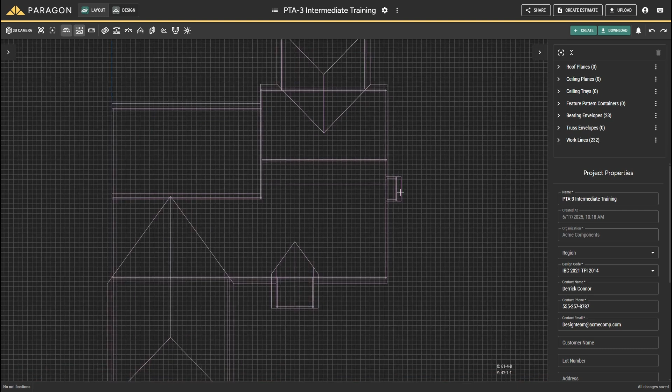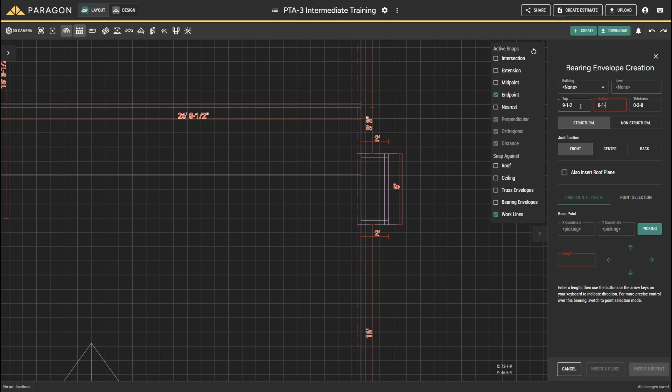Let's right-click and select Bearing Envelope. This is going to be a structural beam, so make sure to select Structural from the settings. This beam will have a depth of 1 foot. So let's add the settings for the top to be at 9 foot 1 1/2. Tab over to the bottom and set this to be at 8 foot 1 1/2. Select Point Selection and let's begin.

Let's add the beam to the fireplace. Click to insert the beam by selecting the backmost point. Press and hold the Alt key. We will move along to the front edge of the fireplace and click. Finish this out by pressing Escape.

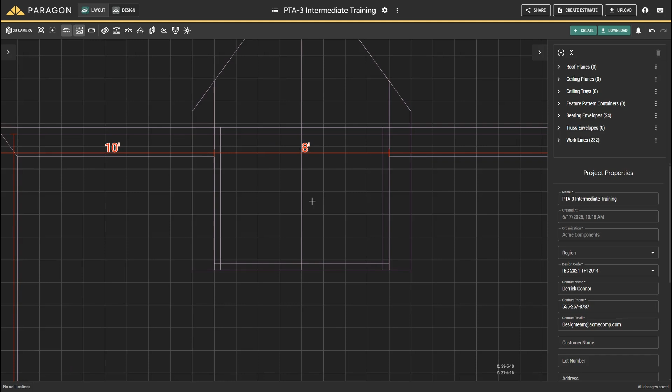Now let's pan and zoom over to the front porch. Here we actually have a different plate height for this one. Right-click and select Bearing. Here we will set our beam at 10 foot 1 1/2 for the top, and the bottom will be at 9 foot 1 1/2.

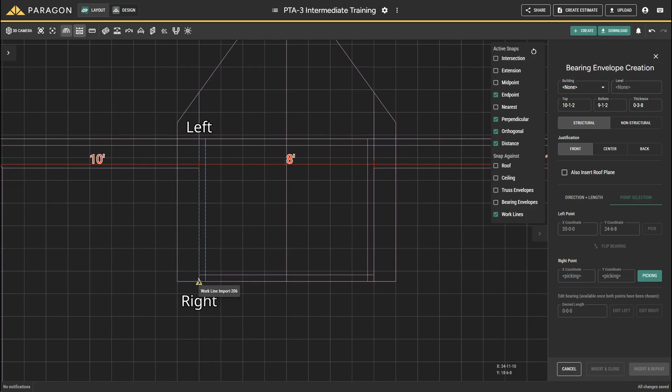Select Point Selection. Let's go ahead and start with the left top side and click to snap your bearing point here. Next, while pressing and holding down the Alt key, click to place the bottom left side. Finish placing the remaining beams by adding the point to the right, then move up and click. Press Escape. Next, we will add the 2 columns on the outside.

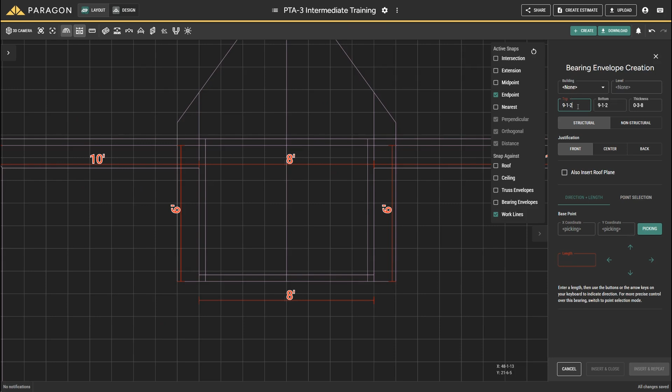These aren't necessarily required for the program to function, but will make the model look better. Right-click to select Bearing. Set the properties for the columns to have a top at 9 foot 1 1/2. Then tab over and set the bottom bearing to be set at 0 inches. Move down in the Properties panel and select Point Selection Method.

Next, we will go over to the front porch and click to place the left side of the column. And while pressing the Alt key, we will click to add the right side. Press Escape. Right-click to select Bearing once again.

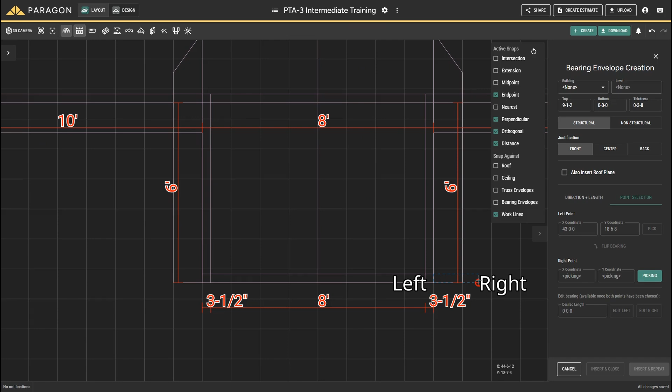Make sure to select the Point Selection mode. Then we will click to place the left side, Alt-click to place the right side. Press Escape to end this column. That will do it for the front porch.

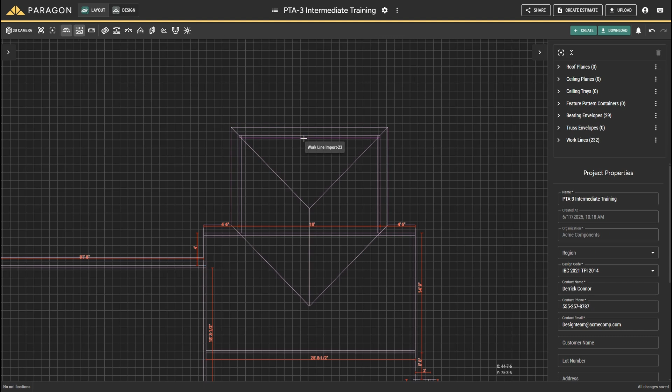Next, we will finish off these bearings at the back of the house. Pan over to the rear porch, and then right-click to create a bearing envelope. Here, we will set the properties for these beams to be at 9 feet 1 1/8 as well. We'll set the bottom so it is at 8 feet 1 1/8, giving us a 1 foot height.

Again, using point selection. So far, we have been inputting the bearings in a counterclockwise fashion. I'll demonstrate putting them in a clockwise fashion. Because of that, we're going to need to change our justification.

As shown here, click to define the start point, and you can see the bearing is on the wrong side. So here we will need to change that justification setting to be back. Click the end of the back side to input bearings in sequence. Press the Alt key to place the upper right end, followed by the lower right side.

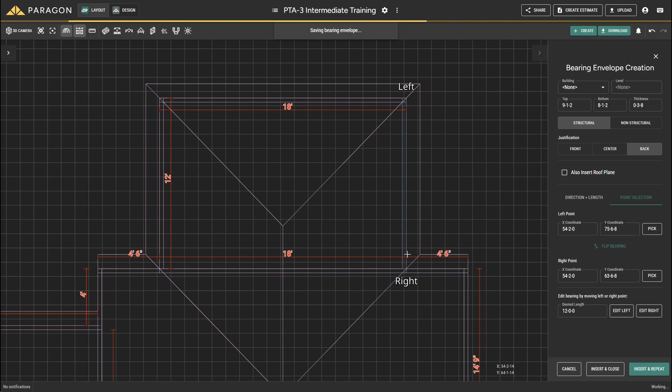And there we have it. Press Escape to end this bearing session. That should do it for these porch beams.

The next thing we're going to do here is put in our columns for the rear porch. Right-click and select Bearing. We will set the top of the column to be at 8 foot 1 1/8, and the bottom to be set to 0.

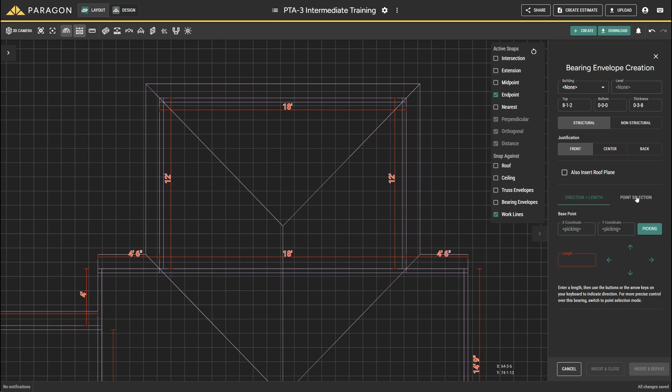We will use Point Selection mode to add these columns. We're going to click that point on the left side and then move over to the other side and Alt-click. Next, click Escape. To add the last column, we're going to repeat these steps.

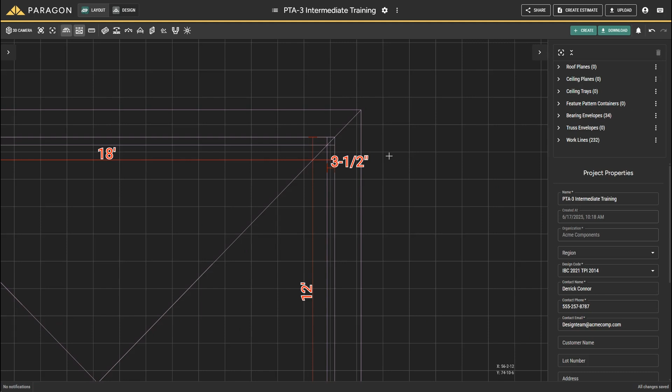Right-click to create bearing. Click to start the left side, move over to select the Point Selection method, press Alt, and click on the right side to end this column. Press Escape. Now we will take a look at this in 3D to see our newly added beams and columns.

From here we can see we're looking pretty good for all of our bearings for the fireplace, the front porch, and the back porch. All right, that's going to do it for this instructional demo.